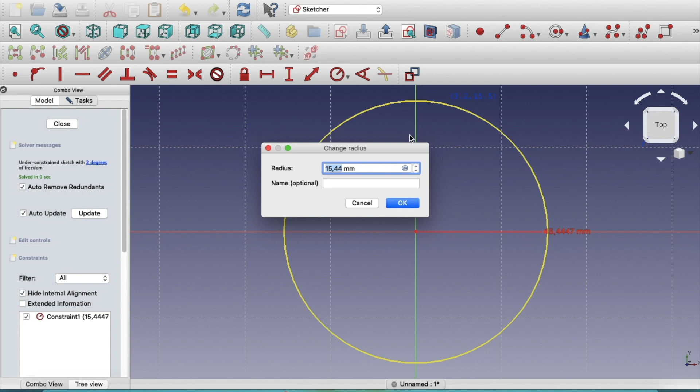The pen stand I'm going to have with an outer diameter of 70 millimeters. First I'll create a circle in Sketcher. Select the origin, create a circle, then go to the constraint operation to constrain an arc or circle, select the circle and enter the radius. The radius is 35 millimeters. Say okay, fit to view.

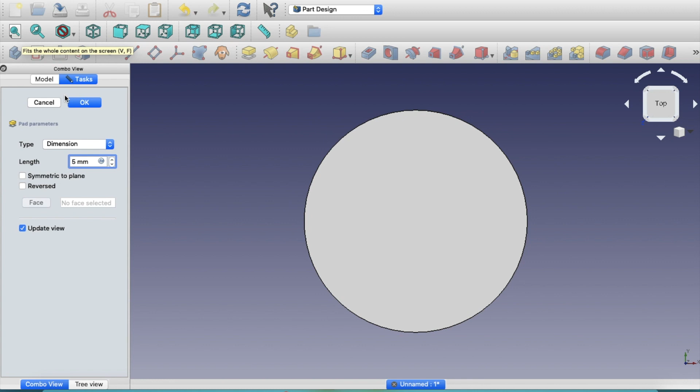Alright, now this is done, close. Then I'm going to pad it up, meaning I'm going to extrude this part. I'm going to extrude it by 5 mm, creating a 5 mm base. So in the isometric view you can now see this thing.

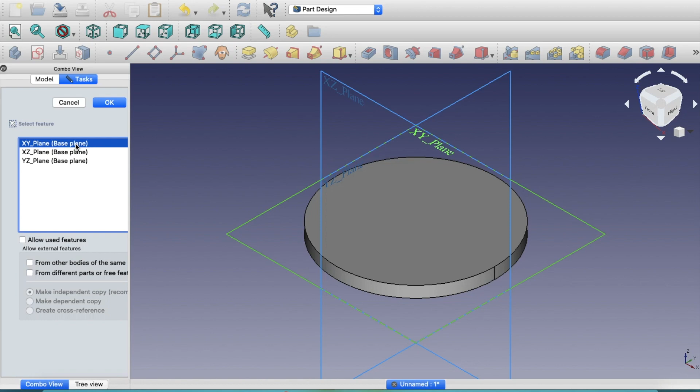Okay, next I'm going to create another sketch, on the XY plane.

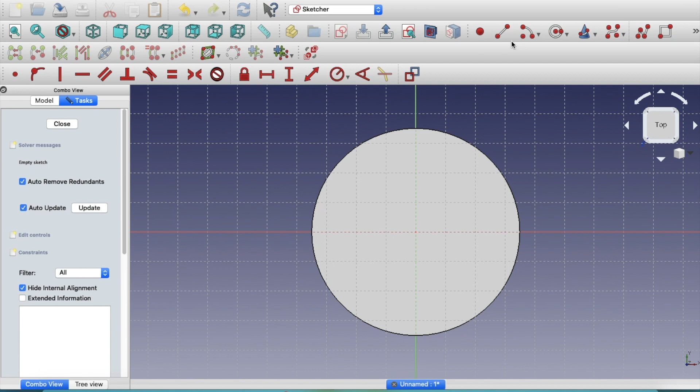Let me create the two circles that I'm interested in. Select the center, draw a circle, select the center, draw another circle, escape. So circles have been drawn. Now let me mark their radius.

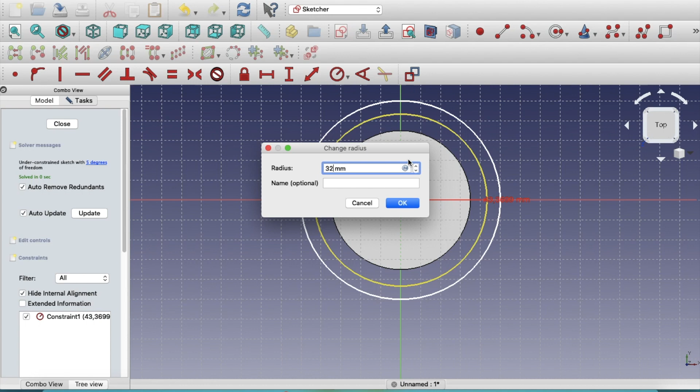So the inner circle I'm going to use 32 mm. And then the outer circle I'm going to use 35 mm. Okay, and say close. Now the two circles are at the bottom of this base I have created.

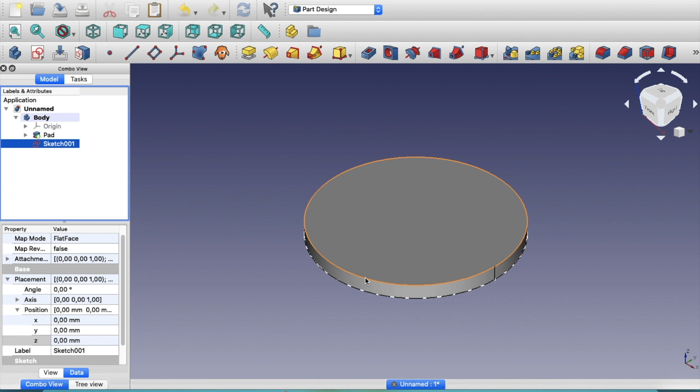I have to bring them to the top. So the way I am going to do it is I'm going to go to attachment, position, and for Z I'm going to use 5 mm. If I do that, my sketch 001 has now come to this level.

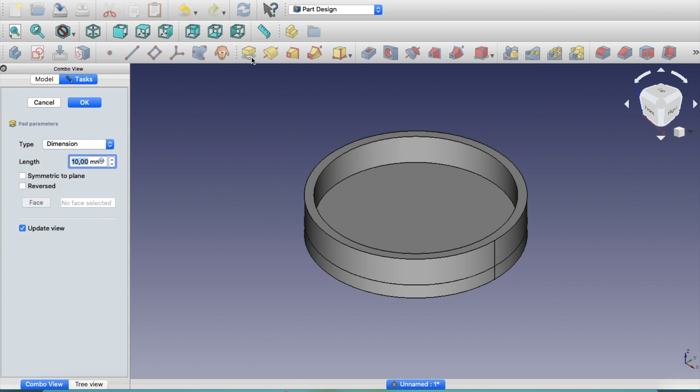Now I'm going to again say pad, and this time I'm going to raise it by 100 millimeters. Again fit to view, isometric view. So this is the part now. Okay, so we have created this.

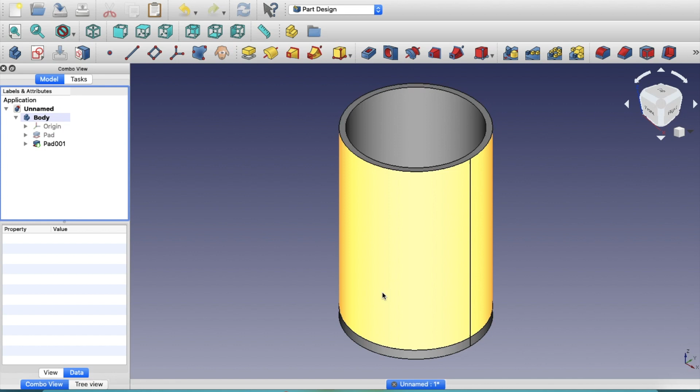Now I would like to cut out an interesting pattern within this cylinder in order to make a nice looking pen stand. So for that what I will do is I will go to an option called part.

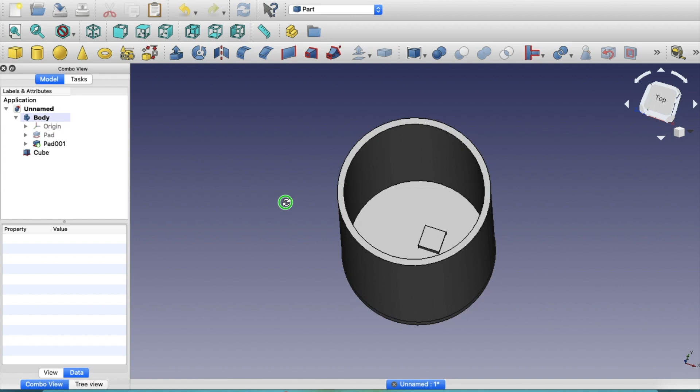Within this option it allows you to create some particular cutouts readily, it allows you to create parts readily. So for example, I can say cube, and if I press the scroll bar and right click and rotate it, you can see a cube which has been created lying at the center of this cylinder.

Now what I'm going to do is I'll go to this cube and change its position. I will move it along the X direction, which is, I want to bring it here. For X I'm going to take this to be 27, and along the Y I will take it to be minus 5. So by doing that I will bring this over here.

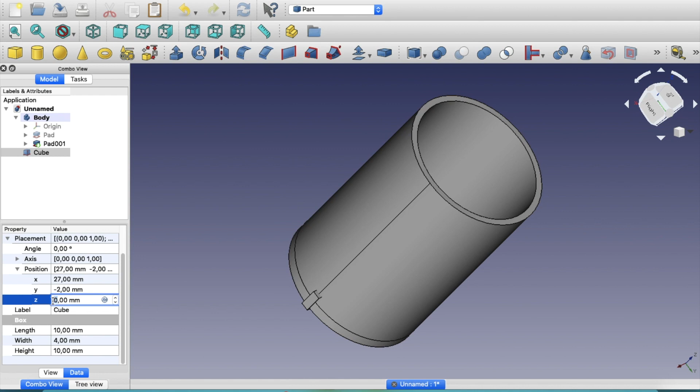Now what I want to do is take the width of this particular cube as 5 mm, so it's no longer a cube, it's a cuboid. Okay, as 5 mm or maybe 4 mm. And then here instead of this, let me take it to be 2, so then it's right in the middle, and Z position I'm going to move it up by 10 mm so that it comes over here.

I'll tell you the logic of what we are trying to do over here. I'm going to create an array of these cubes, and later on I'll subtract this volume from the remainder of the volume in order to create some cutouts.

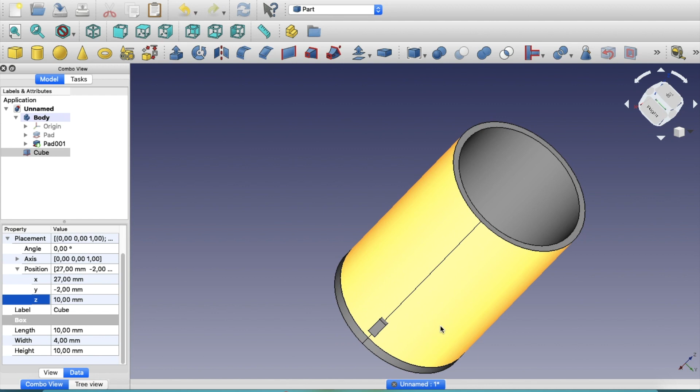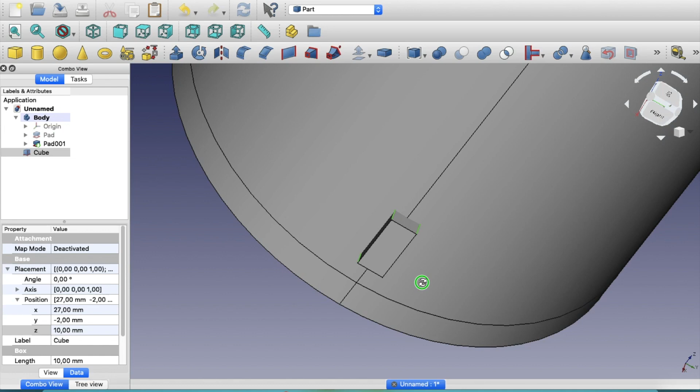Now before I am done with this operation, what I will do is I will select these edges, corner edges. Control press, select these edges. Now in order to see the other edge, I will have to rotate this and then select it. So now I have selected all 4 edges, and after this I'm going to go to the fillet operations over here, and I'll select a fillet of 2 mm radius.

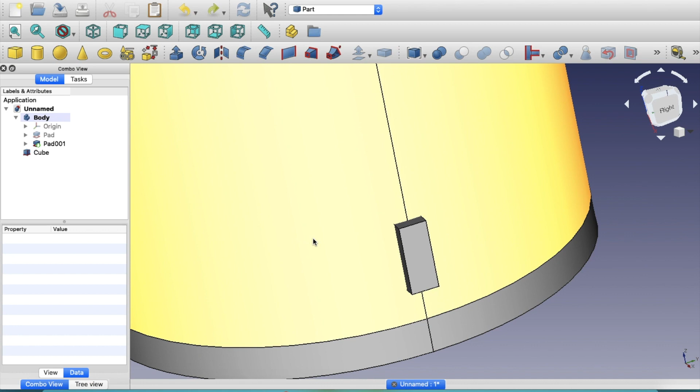Oops, something happened. What happened? Just 1 second, something went wrong. Let me undo. Okay, so let me repeat this operation. Something went wrong. So I will select all 4 edges.

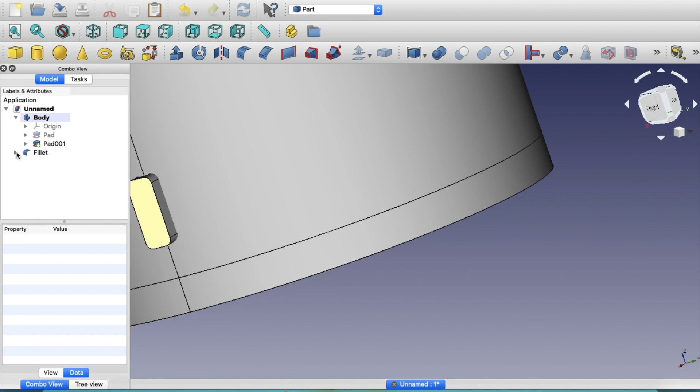Alright, I have selected all 4 edges. I'll say fillet, and let it be 1mm only. Let me see how this is going to happen. I'll say okay. So we can see that this is what is happening if I select the fillet as 1mm.

Sorry, something is happening, I'm unable to control it. Okay, let me go to this fillet option. Instead of 1, if I say 1.5, then this is what I get. So let me go with 1.5mm fillet.

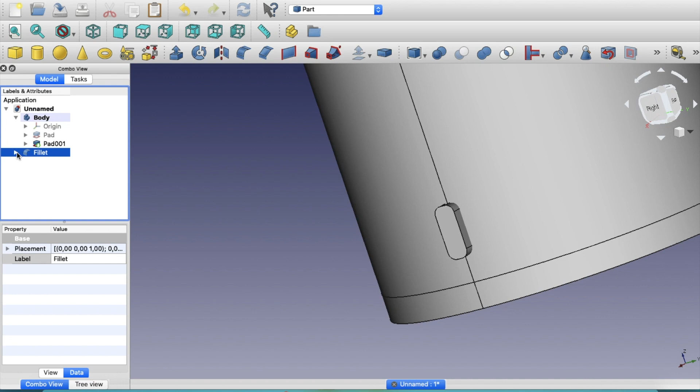Alright, now if I click on fillet, you see this highlighted blue colored portion. Now I want to create an array of this. So to create an array, you go to this option called draft. Click on draft. Now in the draft, let's select this fillet, and then we will select this array option.

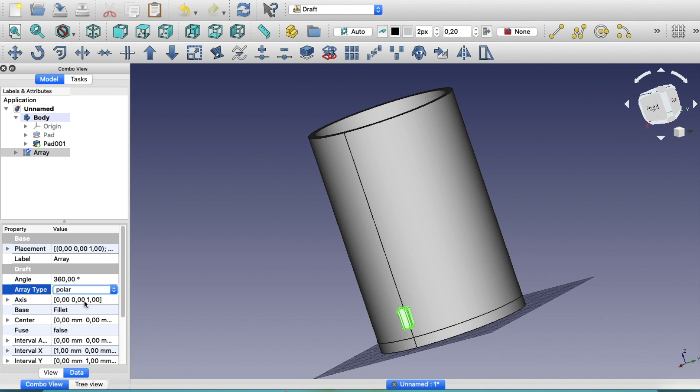Now within the array, there are 2 array types, orthogonal and polar. So let's select polar, and then once you select polar, there are these different numbers which are there. Along X I don't want to replicate, along Y I don't want to replicate, along Z I want to create, let's say 16 of this, or let's say 12 of this.

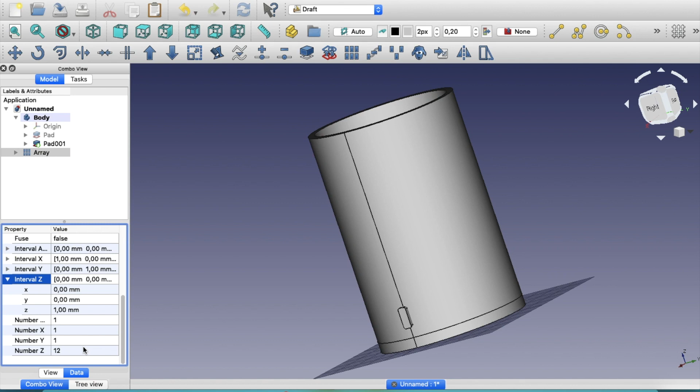So something is happening, this is not getting created. So this is in the Z direction, and oh okay, so I have to enter the number over here. So this is the number that I have to enter in order to get 12 of these holes over here.

If I want more, I can create more. So let's say I want to create 20 of this, so I can do that also. Okay, alright, so now once I have created this array, I want to replicate this array along the axis direction.

So for that, again let me click once more on this. Now it is creating a layered array. Now it is orthogonal, and then now what I want to do is in the Z direction, I want to have this at a gap of 15 millimeters.

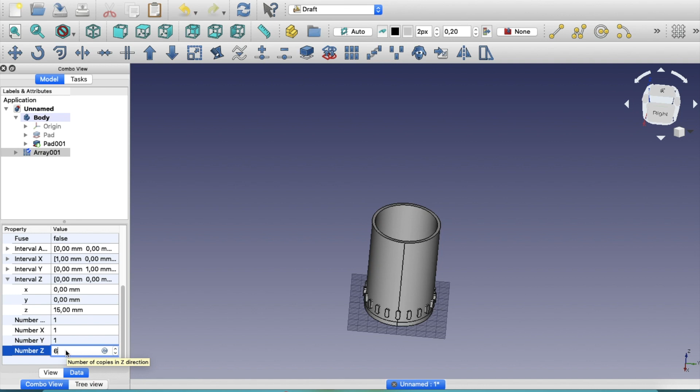And then I do not want to have them in X and Y, but I want to have them in Z. So let's say I want to have 6 numbers of them in the Z direction. And if I press 6 over here, you can see all these things. Okay, so we are done with this now.

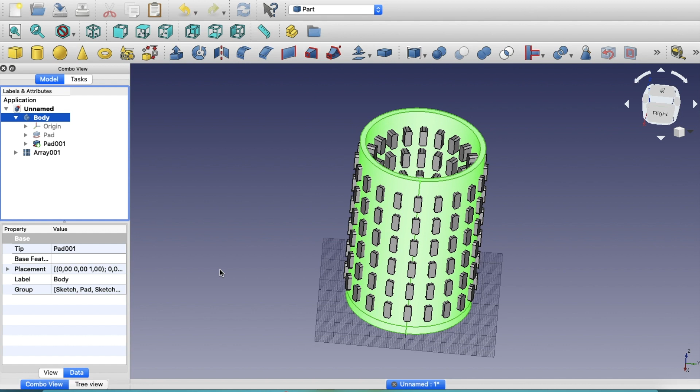Next, let us go to the part module. Now within the part module, what I'm going to do is select this body. You can see the body is this green colored thing, and then I'm going to select this array and I will do a boolean operation.

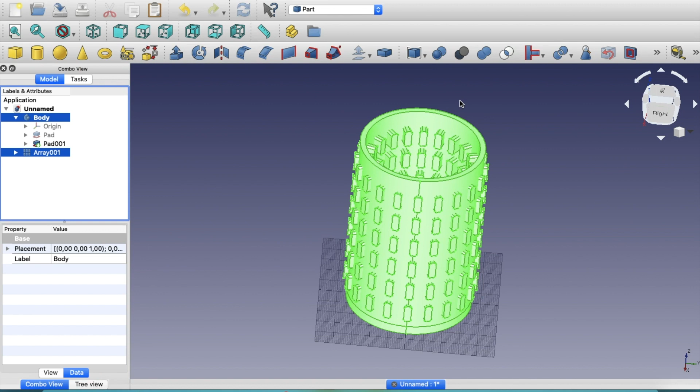I want to cut out these filleted rectangular slots from the remaining volume. So let's see what happens. I'll press this, it's going to take a few seconds for this computation to take place. Alright, that's it, we are done. So you see, we have created a nice looking pen stand.

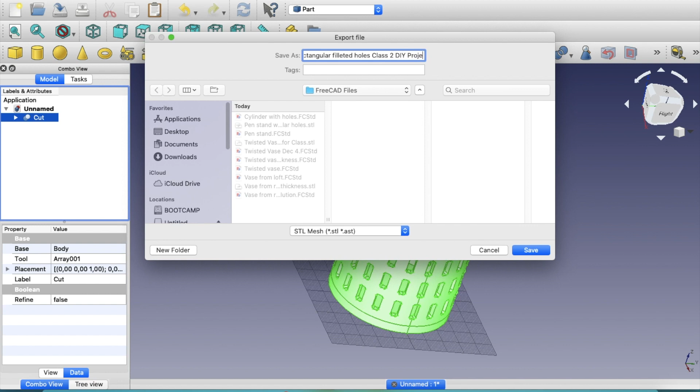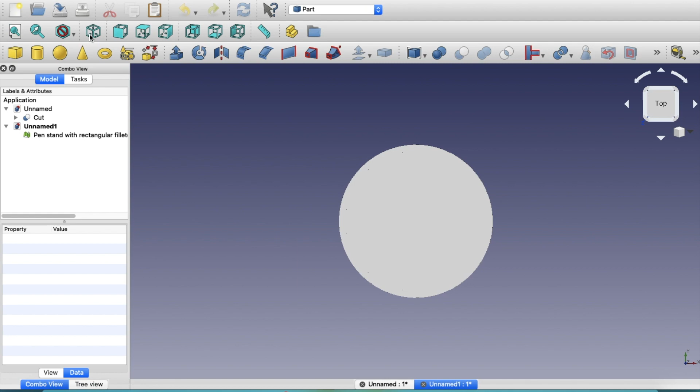Save. Now in order to see whether you have created a correct part for 3D printing, once again go to file, open, and then select the STL file and say open. And so here you go, so this is the STL file. So if we are going to print it, then this is the file that we are going to use for 3D printing purposes.